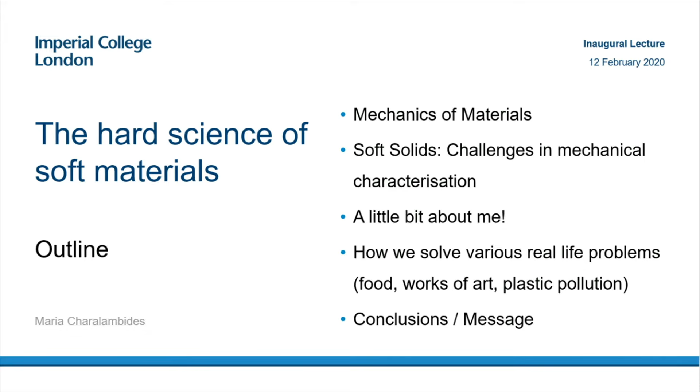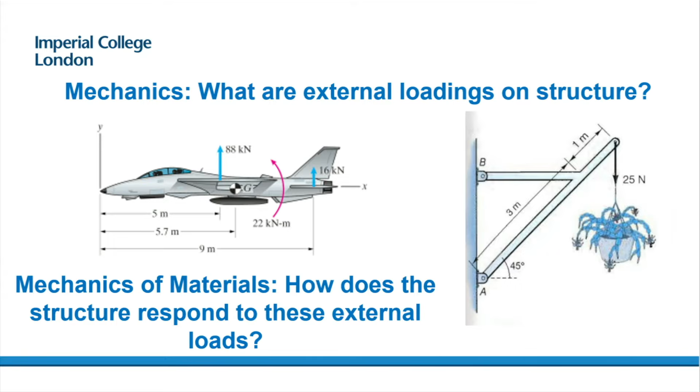Okay, so I've taken these pictures from my first-year mechanics course, and mechanics, the question that it wants to answer is what are external loadings on structures that you want to study. Now, if the interest is how does this structure respond to these external loads, how does it damage, does it deform, does it fall apart, then that's in the realm of mechanics of materials.

To answer this question, you need to look at the materials that make up that structure, and specifically, you need to know what the mechanical properties are of these materials. If you don't know them, then you need to go to the lab and do some tests to find out what these are. So let's say this is a green material that you want to characterize. You want to find out mechanical properties.

First, you manufacture a perfect cylindrical sample like this one, and then you take it in a lab on a mechanical tester, and you apply a uniform load on this cross-sectional area, which is A, and you squash it, basically. So under the application of this load, you can calculate this quantity, which is called the stress. So this is the load divided by the cross-sectional area in which it acts.

And this sample, it will deform to this new shape from its previous height H to the new height h, the shorter and wider sample. The mechanical tester will give you the load as well as the change in the height or the deformation, and from the change in the height you can get the strain. So the strain is the change in the height over the original height. Now, basically this is the response to the applied stress on this material. And for this test to be valid, the stress and strain have to be the same throughout your material.

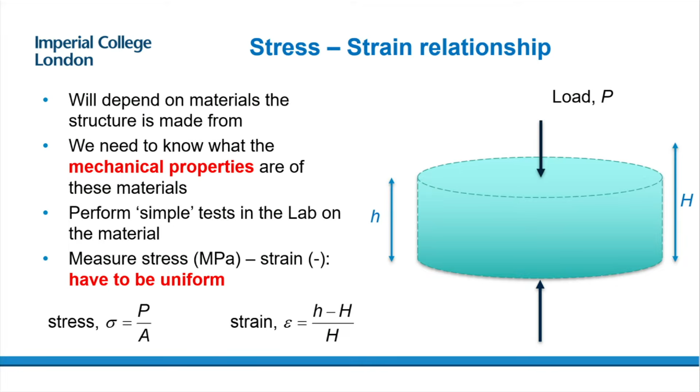Okay, so what are the challenges with this type of work for soft solids? I'll give you some examples of soft solids. It could be foods, it could be paints, gels, soft polymers, all sorts of rubbers, all sorts of soft solids which happen in many, many applications. So it's important to know what the mechanical properties are of these materials.

So what are the challenges with these materials? So there's two areas where you have the challenges. One is in the experiments. For these materials, there's no test standards that will tell you how to make your samples, how to do the test, how to do your calculations to get these stress-strain properties that I was talking about earlier.

It's difficult to make samples of precise geometry, and sadly you cannot machine a chocolate sample into a cylindrical shape. It's difficult to grip or hold them without damaging them, because they're very soft, so if you want to hold them to do a tensile test, for example. Or a lot of them are so soft they're more in the complex fluid domain instead of a soft solid, and then they deform under their own weight. So this is before you start putting external loads on it.

But even if you manage to overcome these difficulties, then you reach the next hurdle, which is the hurdle of how to find a material model that will fit this data that you're going to collect from these experiments. So we need a mathematical description that will provide the deformation as well as the fracture of the material that you managed to get data from for these experiments.

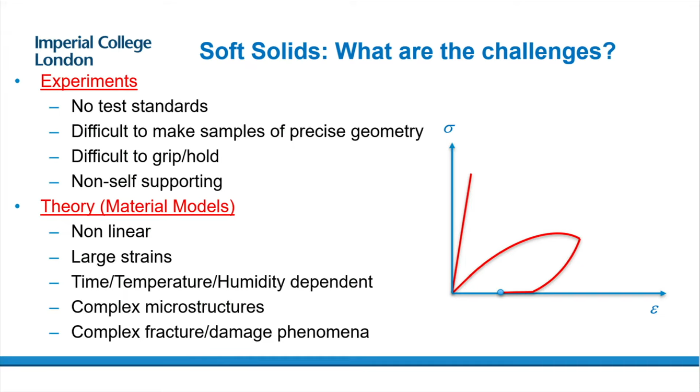The other problem is that this material, when you're testing it, if you slightly change the temperature or the humidity or the speed that you're doing the test, you're not going to get very large differences, whereas this material here will show a huge effect. So this is all the things that makes modeling these materials very hard.

These are some pictures taken from some of our research papers. These are all mechanical tests that we've done. This is dough, tension of dough. This is compression of cheese, and this is gel, again, compression. And all of these are examples of mechanical tests.

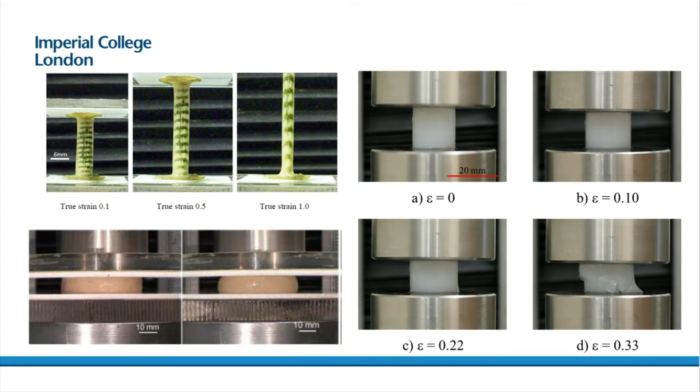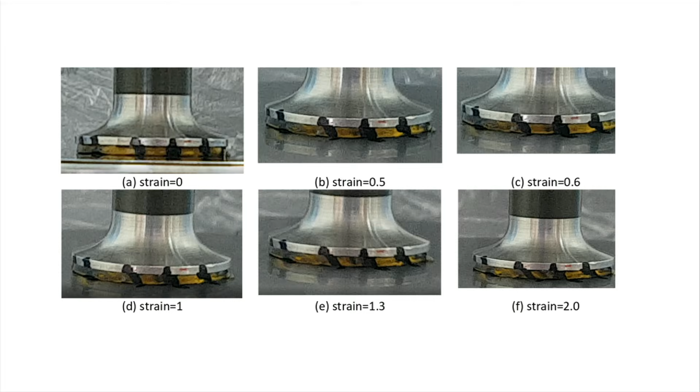And this is slightly different. So we want to characterize this yellow piece of polymeric material here. And how we're doing this, we're putting it on a stationary surface, and then we have this spindle on the top, which will rotate. So you're basically twisting your material, so you're shearing the material. And these are called rheometric tests, as opposed to mechanical tests, the ones I showed you earlier. If your material is very soft, so we said, a lot of these materials are on the boundaries of solids and fluid, this could be your only option of probing the mechanical response of the material.

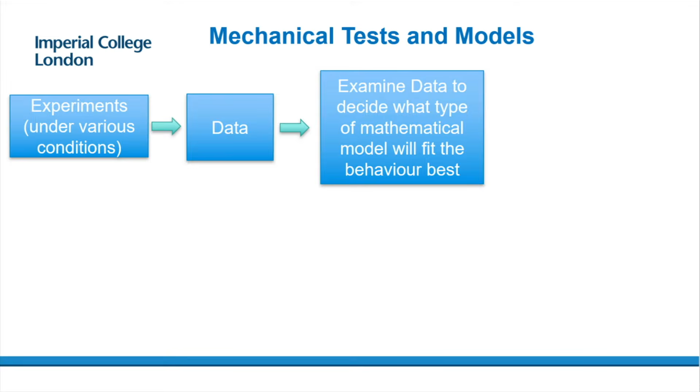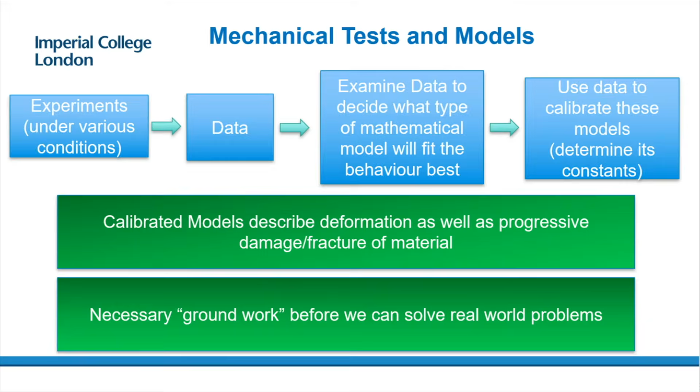Okay, so this is just a summary of this introduction I've made for you. So first of all, you need to go to the lab and do lots of experiments under various different conditions. You amass your data. And then you need to examine the data to decide what mathematical model you'll need to describe this behavior. Once you've done that, then you need to use this data to calibrate the material models. Once you've calibrated your models, then you can use them to describe the deformation as well as progressive damage and fracture of your material. And this is all necessary groundwork that you need to do before you begin using this information to solve real-world problems.

Okay, a little bit about myself before I show you these real-world problems. As Mike said, I got here in 1985 from Cyprus. This is a picture from Akamas. This is the opposite side of the island to where Agia Napa is, which many of you might have heard of. What people don't also know about Cyprus is that it has beautiful mountains. This picture was taken in the summer. We were there on New Year's, and this was covered by a meter of snow.

So this is a picture of my school. This is my secondary school. It's the oldest school in the island. And I was lucky to go to this school because I had very inspirational teachers who knew the subjects extremely well. There's two more people that inspired me to be here. These are my parents, Nikos and Nedi. They're both engineers, civil and mining engineers. And for my generation, it was very rare for my friends' mothers to be educated to university level, let alone an engineer. So my mother was actually the first female civil engineer that was registered on the island.

Okay, so I came here, I did my degree, I enjoyed that. I wanted to stay on and do further research. I did that under the supervision of Gordon. My project was quite interesting. It had both experiments and models. The experiments involved a lot of mechanical testing, which is the ones I've talked to you about.

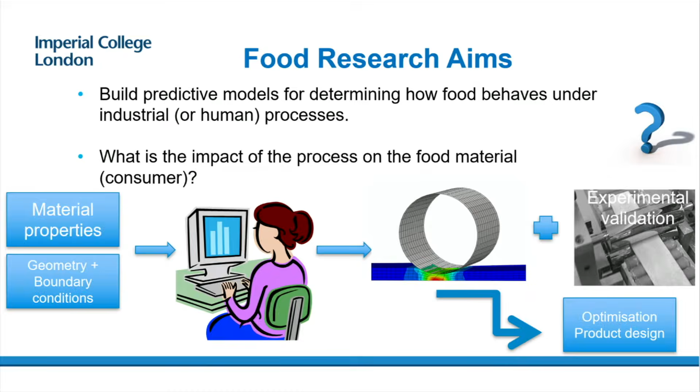If you have this simulation tool, then this tool will output the strain, the stretch that the material sees in this direction as it gets rolled, and therefore you can predict before you do this that this material is going to tear, such that you can avoid it. You can use this tool to decide how to stop this happening, either by changing your recipe, your material, or changing your process parameters.

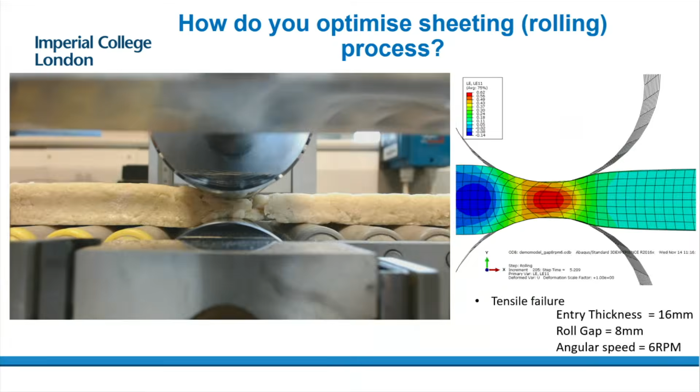Now moving to the oral process. This is what happens when we put food in our mouth. I'll only be talking about texture today. There's aroma and there's taste, which is not part of our research. Texture is basically how does food feel when it is eaten. The food industry wants to know how consumers will react to the new products.

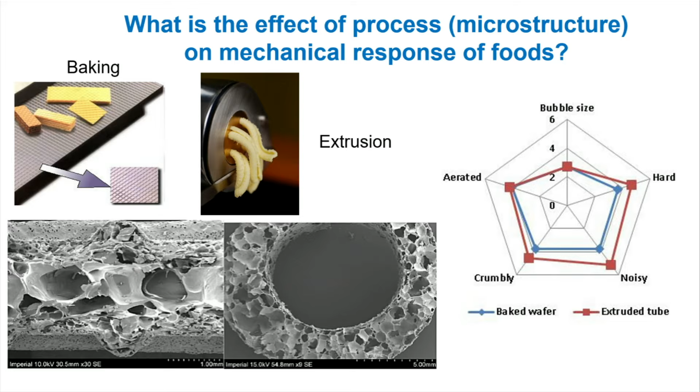These are the structures of the two materials, and you can see the similarities in the two photographs. They're both cellular materials with thin cell walls. I should say that both products have exactly the same density, so that's not what drives the differences. And the pore size distributions are also very similar. So to find out what the differences are, we take the three-dimensional images from X-ray tomography, and we use them inside these computer simulations to do virtual compression tests.

What we do then is we get the output from these models, and then we see what value of mechanical properties we have to put on the solid that makes the thin cell walls, such that the output of these models is the same as the experiment. And this gives us a measure for the properties of this solid cell wall, which otherwise would have been very difficult to measure. And we found that indeed the extruded product has much stiffer cell walls.

The other thing we could do, of course, once we have the two geometries, is to input the same material properties for the solid wall, and then you pick up the differences. Again, this came out to be stiffer, and this is just the effect of the microstructure. So extrusion seems to lead to stiffer microstructures because of the different material in the cell wall, as well as the different architecture of the cellular material.

The next project I'm going to talk to you about is where the pet food industry wants to market these products for cleaning dogs' teeth. It's very difficult to brush dogs' teeth otherwise. When the dog chews these products, through friction, we want to remove the tartar and the plaque that builds up on the dog's teeth. However, dogs come in different breeds. They chew in a different way. Can we have a design tool that we can use cost-efficiently to design these materials?

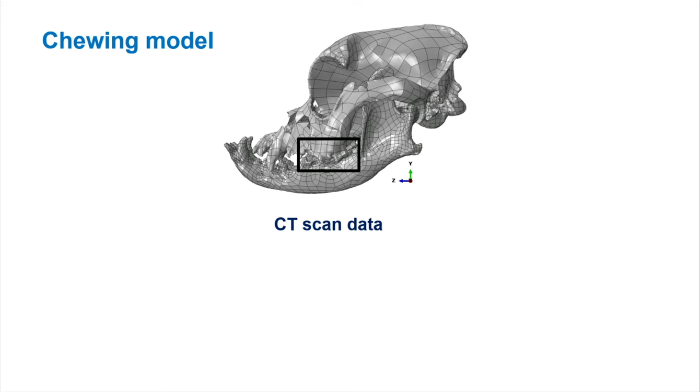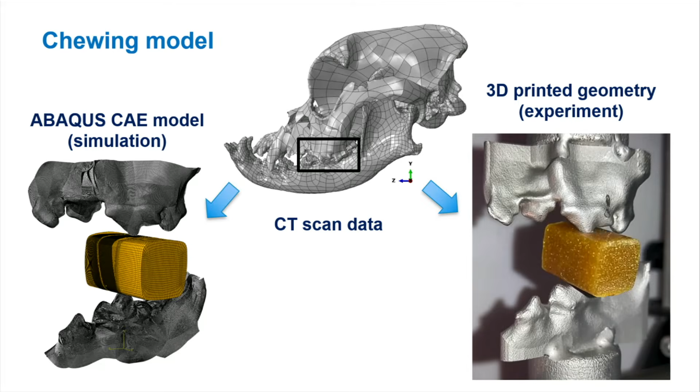And this is what we did to solve this problem. This is a skull of a dog. We concentrated on this region, which are the back teeth here. And we did two things. We used them to fit inside a computational model, and also 3D printed these structures so that we could do a real test. And the idea is to see whether these two match.

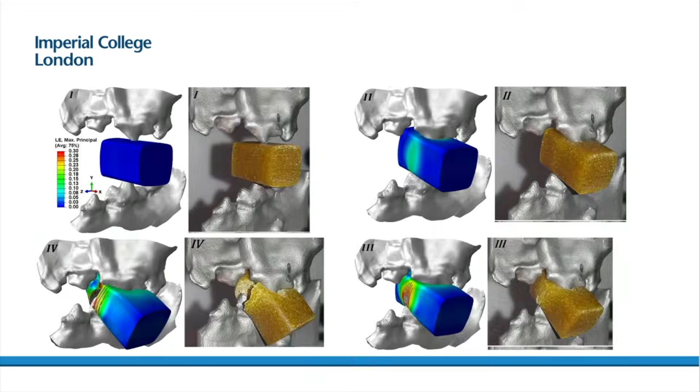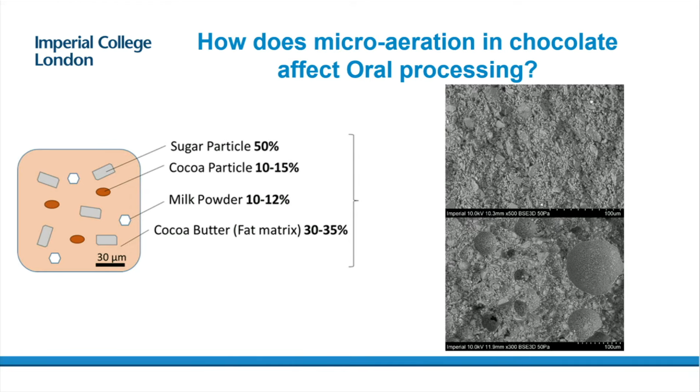What we want to see is the effect of including aeration of about 10, 15%. The scale of these bubbles is about the same as the size of the particles here. And we want to find out what the effect of this is. Now, these are so small that you cannot actually see them. Bubbly food and drink seems to be favored by the consumer. We want to understand why that's the case. And bear in mind that if you don't see these bubbles and you prefer this product to the one without the bubbles, you're actually consuming a lower energy density product as well.

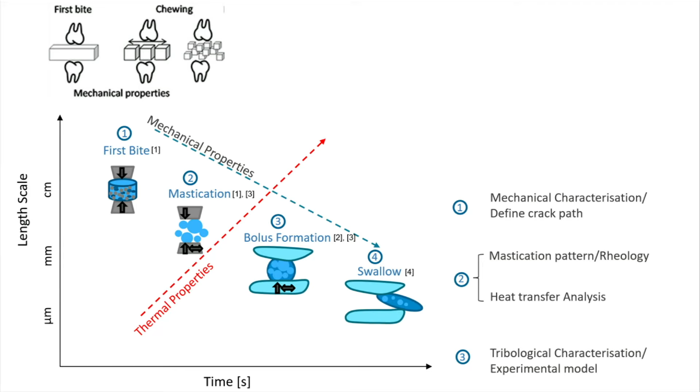So what happens during first bite is you have your material here and it's indented by the teeth, and the purpose of chewing is to break it down into smaller and smaller particles. So on this graph, mechanical properties are very important to begin with. Of course, as this food goes into your mouth at 37 degrees, heat transfer starts taking place. And Yanis here is helping us with this topic. We're trying to answer questions like, does microaeration change this pattern? And does that have an effect on how quickly the material changes phase, for example? Does the consumer pick this up?

Once these particles are formed, then they mix with saliva and they're squashed in surfaces in your mouth to form a bolus, that's what it's called, this soft solid. And then here you would do the rheological test to characterize it.

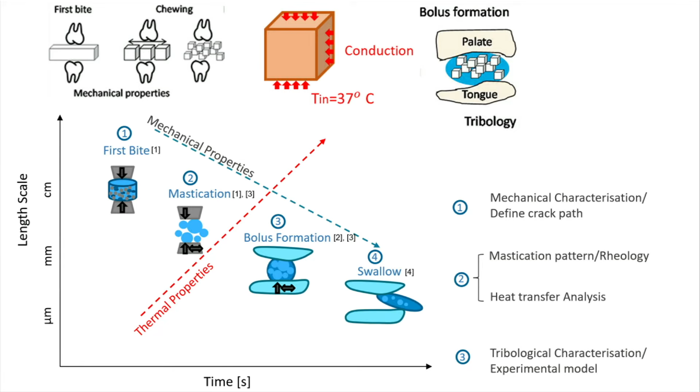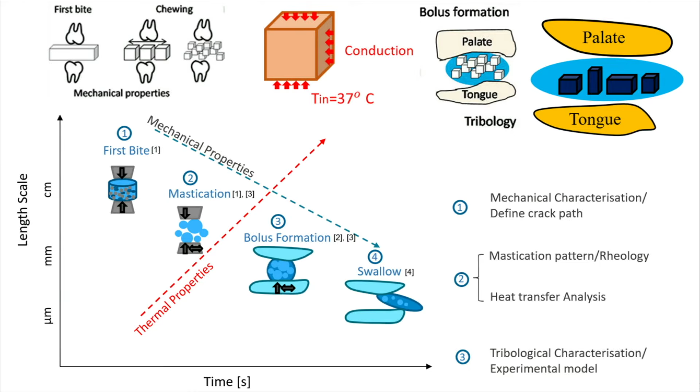Of course, this interaction with the tongue and the top of your mouth is also quite important, and maybe it does affect consumer perception as well. And this is in the realms of tribology, the study of friction. And here, Philippa and Mark are helping us to look at this problem. So it is a collaboration. This is a complex problem, and with different expertise, we're trying to bring it all together to understand what's going on when we have microaeration in chocolate.

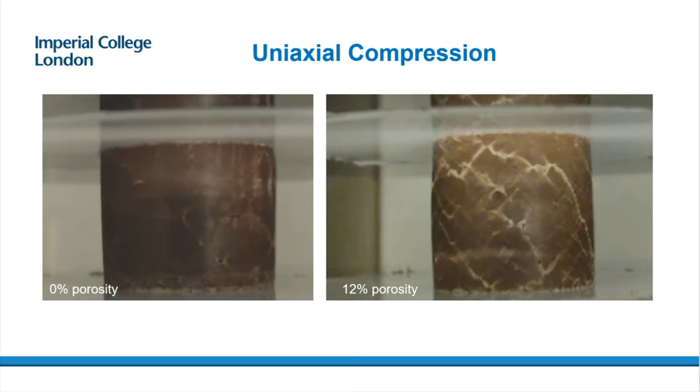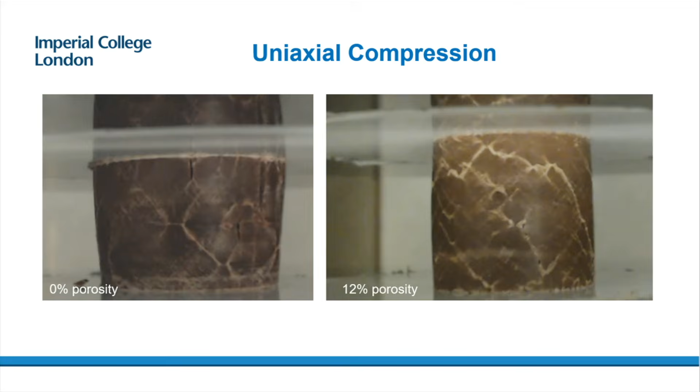This is mechanical tests. On the left here is a 0 porosity chocolate, and here is 12 porosity chocolate. And you can see that this has started forming the cracks straight on. Actually, here the test has stopped because there was a crack that went right through the material, whereas this keeps on going. So it's obvious that the aeration seems to induce earlier fracture in the material.

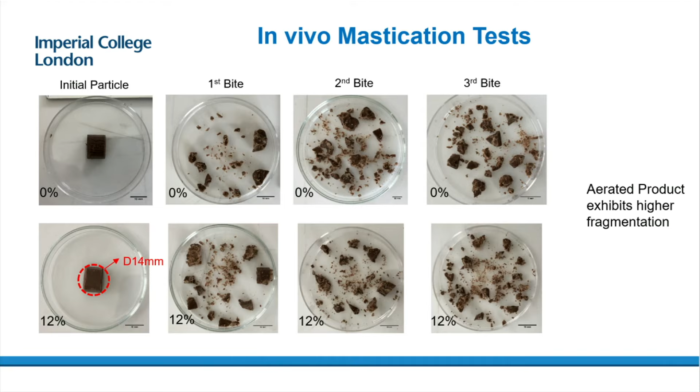What we're trying to do at the moment is to develop models that predict these fracture paths, and that will help with understanding the aim that we had before. But also, it could be quite exciting, because if we have a model that predicts crack paths, then maybe we can strategically place sugar in those regions that will be exposed, and then you will actually sense them in your mouth, because at the moment we're eating a lot of sugar, fat, and salt that we don't actually taste. So this could help to design products which could help us fight diseases like obesity and type 2 diabetes.

Okay, moving on, after you eat the food, it goes down to your esophagus, and then it enters your stomach, where here you're going to get further disintegration, and the food will then leave the stomach to go to the small intestine, and this is the area where all the nutrients are taken up from your food. It's important to study this because it affects metabolism and our health. And here we're looking for tools to design food structures such that they disintegrate in a controlled manner, and we benefit from the nutrients that are available in the product.

One thing I've learned from mixing with lots of our collaborations in this subject, like the food scientists and the medical people, is that just because on a packet it says these are the nutrients that are available, it doesn't mean you access them. It doesn't mean that you will actually benefit from them. Whether you will or not, it will depend on how the food behaves in the gastrointestinal tract.

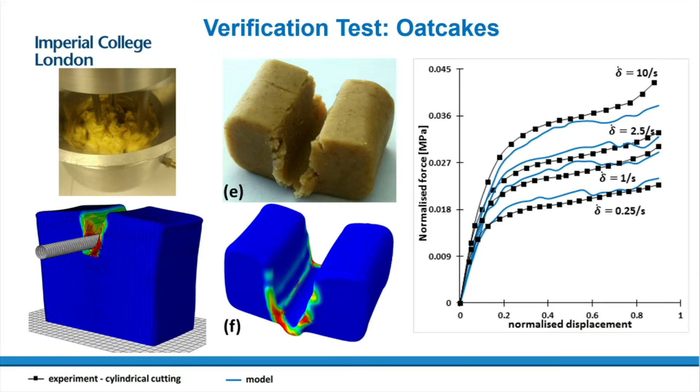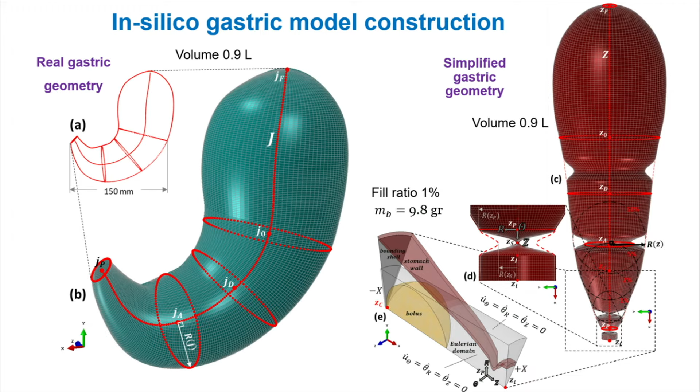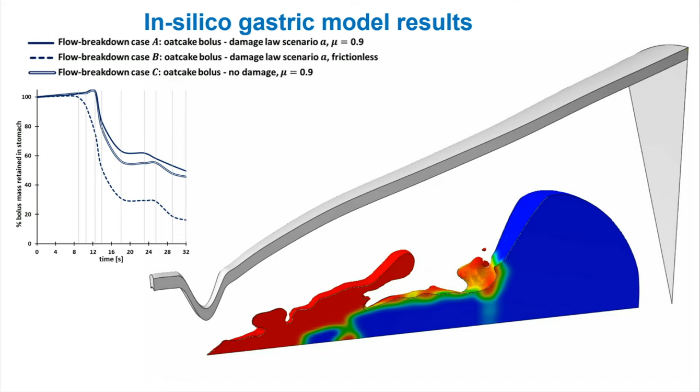So this is the model. And you can see the peristaltic waves and how they break the food and push it out of the stomach. And using models like this, we can study a lot of quantities. One that I have plotted here is how quickly the food leaves the stomach. And of course, this is important for nutritionists, things that might be linked with how quickly you're going to get hungry after you've eaten this meal, of course.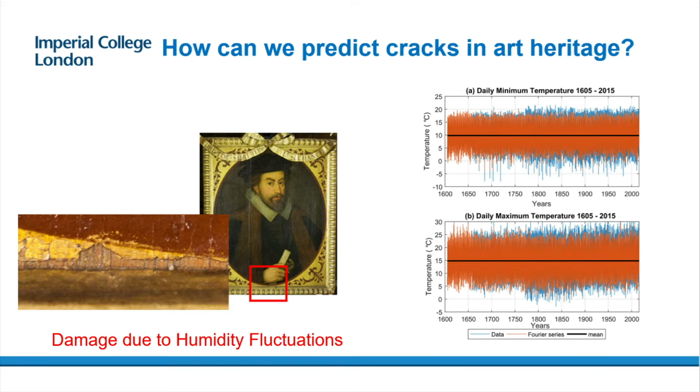Okay, leaving the world of food to something completely different now. The question in this project is how can we predict cracks in art heritage? This is one of 43 portraits that we're examining, and the interesting thing research-wise about these portraits is that there's 43 of them, and they're all stored in the same gallery, in Knole House in Kent, and they're inside some gallery which has no modern heating. So by looking at meteorological data from 1600 to 2015, and using simple models, we actually found out what is the temperature and humidity fluctuations that these portraits have all been exposed to.

Why we care about the temperature and humidity fluctuations: these paintings are made out of different layers of paint. When the humidity changes, each layer wants to expand by a different amount. It starts pulling on the other layers next to it, and that's how cracks form. Of course, this pulling is very small, but if it happens continuously over a very large number of years, then eventually you get fatigue, and this is what causes the cracks.

So there's two types of cracks in such paintings. This is the interfacial or delamination cracks. Basically, this is paint flaking off, like you see here in the gilding of Charles III. So the gilding has come off and has exposed the original blue layer underneath. And the same here with Queen Elizabeth. You've got all this piece of the gilt, the gold bit that came off, and we have the black paint layer underneath. Here we have all the layers have come off, and you expose the wooden panel underneath.

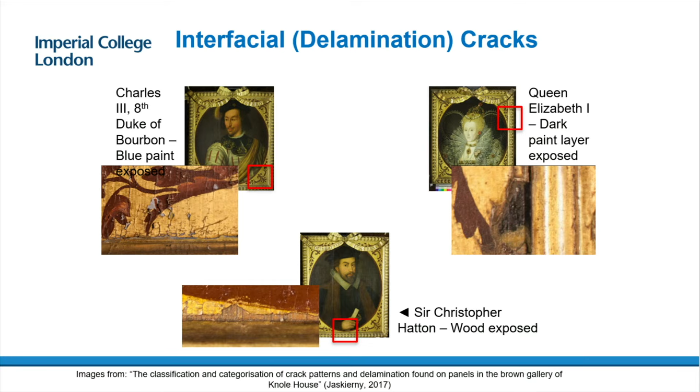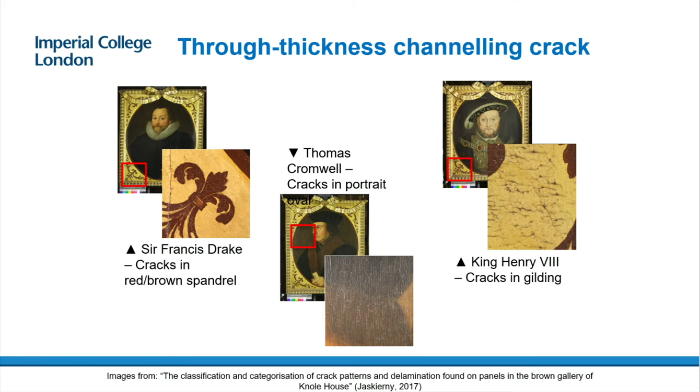The second type of crack is a through thickness crack. So this is a crack that happens normal to the plane here. So you can see it here, King Henry VIII. So you can see these cracks are going through the layers, but also propagate along the painting. And you can see it here on the actual portrait, which is more severe, of course. And there's also some here as well. So these are the models that we built to try and predict when cracks will form as a consequence of this fluctuating humidity and temperature.

This is the model that we use for delamination, the flaking off of the paint. This is a quarter of a painting, and this is the top view. So imagine your painting is this size. We're only modeling a quarter of it. And in the middle here, we have a flaw. We have a crack. We subject this to the fluctuating humidity, and then we see how long it takes for the cracks to start propagating from this initial flaw. And this is the model that we use for through thickness cracks. So this is the cross section, and then the crack is going to go through the thickness, but also it can run along the painting as well.

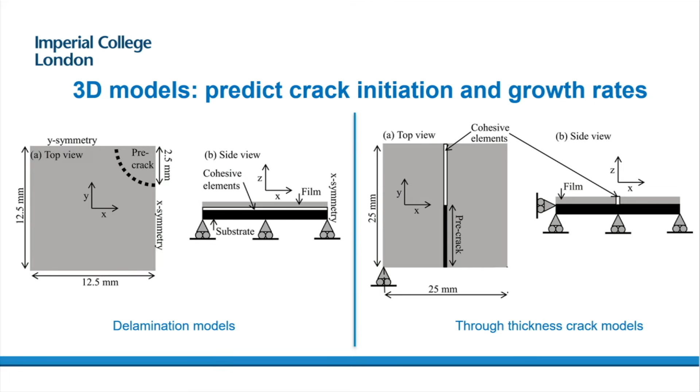And these are some of our predictions. I have three scenarios here for relative humidity. This varies from 35 to 90 maximum, and this is what you would get on a calm day. And it would take just about 2 years for cracks to start growing. These two are much tighter controls that you would typically have. This is the V&A museum control. And you can see that as you make this more and more controlled, then it will take longer for cracks to start growing.

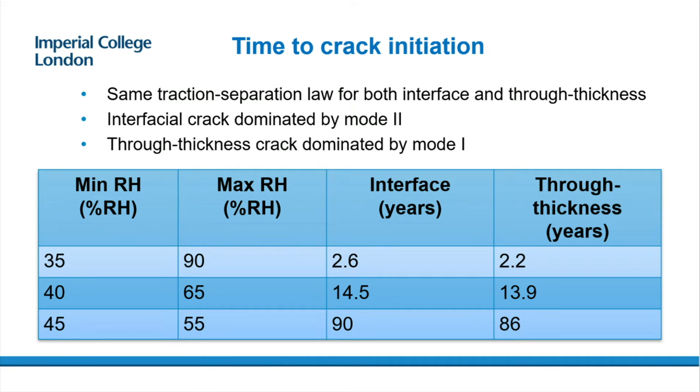And what we're doing at the moment is, it's fine to find out when cracks will initiate. What's more important is how fast will these cracks grow, because it could be that they initiate, but then they don't grow very fast. If they grow very fast, that's a lot more serious, and that's what we're doing at the moment.

Okay, this is a different project that we got involved with within the last year. It's part of a large project within 7 different departments of the college. The aim of the project is: what can we do to reduce plastic pollution?

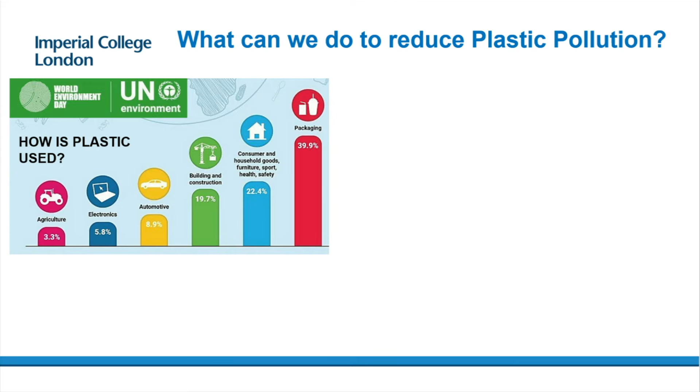So plastics are used in various industries. This chart shows you that the packaging industry is the one that uses plastics most. And this graph shows the top 10 types of litter that were quantified in the Thames River Watch in 2017. And you can see the biggest one is food wrappers. And the others are also plastics which are related to food and drink and fast-moving consumer goods.

Now, there's been a lot of discussion about this plastic pollution in the media, led by very high-profile individuals like David Attenborough and Greta Thunberg here. It could be very dangerous for our environment or our ecosystem. We need to do something fast to reduce this.

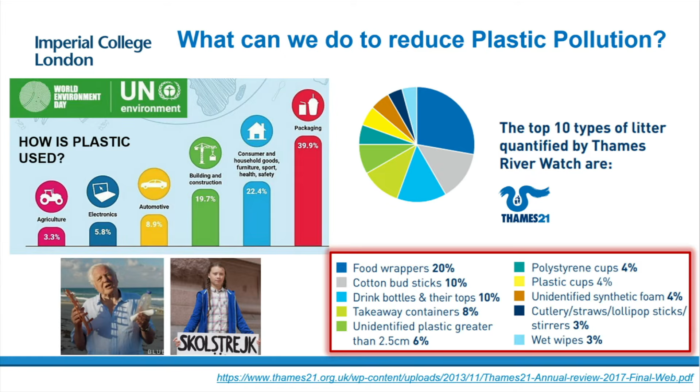Okay, so what have we decided to do? We're going to look at these materials here, the multi-layer packaging materials that we're all very aware of. We've all seen it very often in our kitchens. This packaging has been very cleverly engineered such that it keeps the contents to as long a shelf life as possible, and therefore it minimizes food waste.

They've also been engineered such that you use as little material as possible, so you save your material resources. And it could also mean that if you have a lighter package, then you will have lower transportation costs. This is the typical structure. We've got 5 layers here. So this is the outer layer where all the printing and the brand images will be printed on.

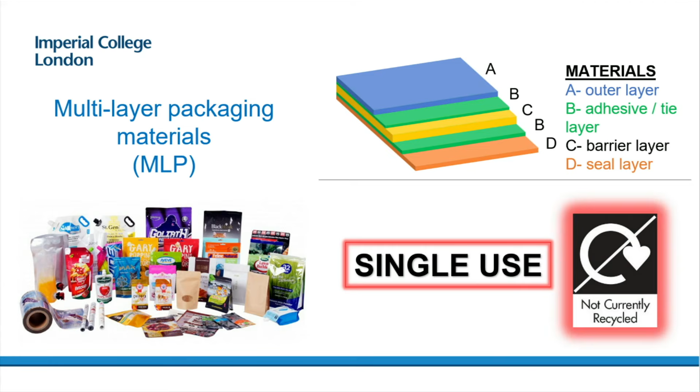The middle layer, C, is the layer that keeps light, moisture, and oxygen out. And this is the layer which is in contact with the food and also seals to form the pack. And the greens are the glue that sticks the other layers together. The trouble with this packaging is that it's single use. Once you've used it, you cannot recycle it.

The reason is, provided that, of course, it doesn't just get littered, in which case it will directly go to pollute our environment, if it does get collected in waste management, it will get sorted into this pile of mixed plastics waste. And then it will either end up in incineration or landfill. None of this is good.

The worst thing is that you had a material, you spent a lot of energy, you made CO2 emissions to produce that material in the first instance, and then you lost it through this process here. Both of these will add to CO2 emissions, and we also have a risk that it could leak back into the environment.

The reasons why these materials don't get recycled are summarized in this table. The first one is sorting, which is not effective enough to pick up the different materials in your package. This is why it ends up in this mixed plastics waste. And anything flexible that's smaller than A4 currently does not get recycled, so food wrappers, for example. Even if you did recycle this and tried to blend them to form a new material, that material is going to have very low value.

The reasons are that its color is going to be a not so exciting dark green, grayish color. The mechanical properties will be very poor, which limits your applications. And that means that recycling is not economically beneficial, and this is why it doesn't get recycled.

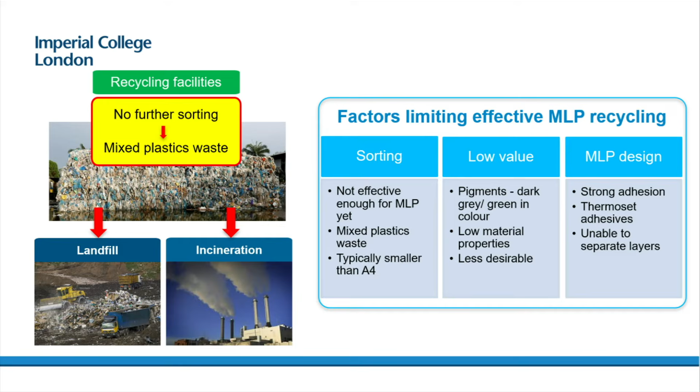The last reason is the way that these packs were designed originally. Recycling was not taken in as a design variable. The layers are very well bonded together, and it's impossible to separate them. If you could separate them, the recycling would have been a lot easier because you would have had a single polymer then.

Okay, there are 2 types of recycling solutions, either mechanical recycling or chemical recycling. And in this large project across the 7 departments, we're looking at both. Mechanical recycling breaks down the materials mechanically, through shredding, for example, and then you melt them all together to form a new material.

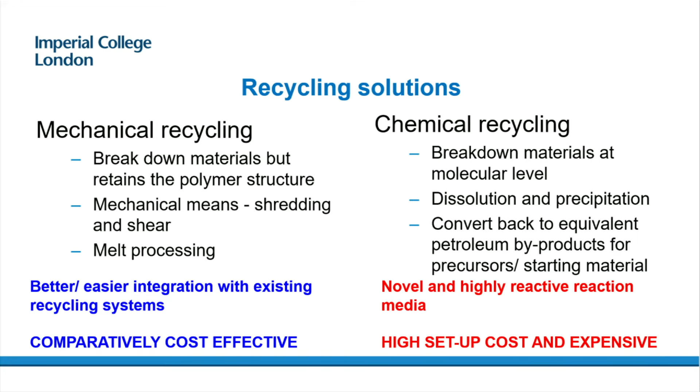Whereas chemical recycling uses highly reactive reactions to break down the materials to their precursors, the monomer that was originally used. And from here it's quite good because then you can start again and make whatever material you want. There are advantages and disadvantages in both. This is very expensive. This is comparatively less expensive and is easier to integrate with recycling systems. But we're looking at both, as I said. Chemical recycling is looked at in chemical engineering. Here in mechanical engineering, we're concentrating on mechanical recycling.

And within that project, there's two things that we thought that we could do to try and solve this problem. Here I have a picture from literature which shows what you get when you try and blend PET film together with a polypropylene film. So the PET separates out into these particles in a continuous polypropylene. The reason why this material is not very strong is because there's not very good adhesion between the two phases.

What you can do is to add a small amount of chemicals, it's called a compatibilizer, which changes the adhesion of those two interfaces, and it makes, therefore, this material have much better mechanical properties. So we're performing studies here, both experimental and modeling, to understand the effect of compatibilization on the recycled material properties.

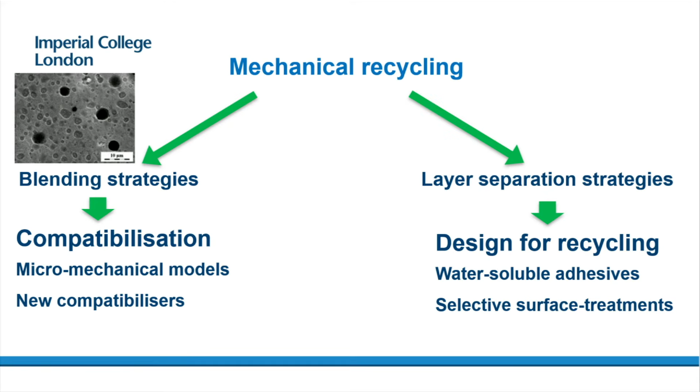The second thing that we're doing is we're trying to look at layer separation strategies. So what if you didn't use those very strong adhesives? You could then separate the different individual films and make the multi-layer package. Or what if you didn't have perfect bonding throughout? You don't really need that. So then when you shred it, you can separate the films very easily and recycle it in a much easier way. I'm going to tell you a little bit more about this.

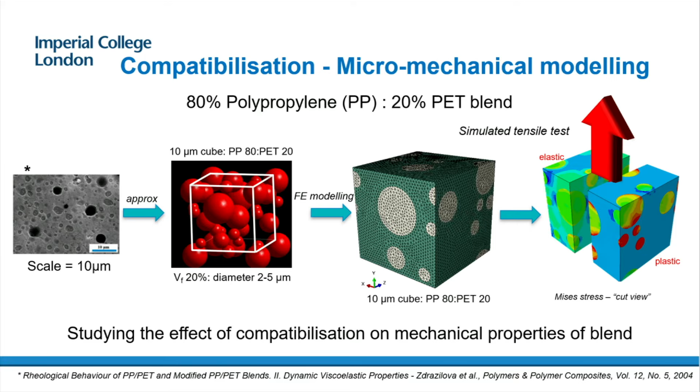So this is a literature picture. Based on this image, you can make a virtual material, with the same size distribution and volume fraction as the original. And then you can do mechanical tests, virtual mechanical tests, to understand what the mechanical properties are of this material as a function of the adhesion between the two polymers. We're in the process of actually doing our own experiments as well, in collaboration with the aero department.

This kind of modeling is called micromechanical modeling, and this is something that we've done a lot of in my group. We looked at a number of materials under the microscope and tried to examine the effect of the microstructure on the mechanical properties. So a lot of materials, when you look at them with the naked eye, they look homogeneous. But when you look at them under the microscope, you can see that they have a microstructure. So this is particles inside a continuous matrix.

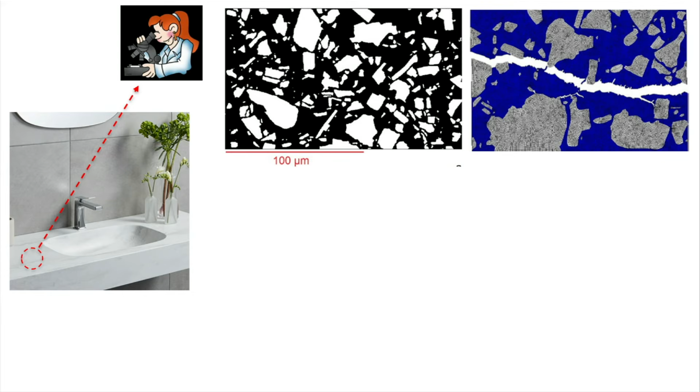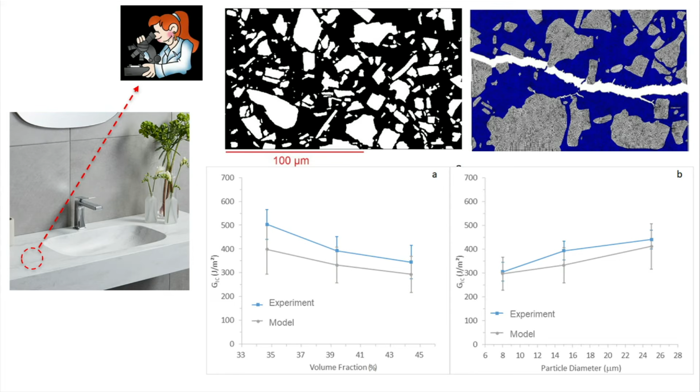And then you can do the virtual tests to predict when this material will crack, how much it will deform. And you can use models like this to predict important mechanical properties like the fracture toughness here as a function of the volume fraction, the amount of the particles you have, and the size of the particles. Once you make these models and you're confident that they're accurate, you can use them as very cost-efficient design tools to make new composite materials.

So this is the end of my talk. So I'd like to end with my conclusions. I think the message I wanted to bring across today is that you can be seen to be doing lots of diverse things, but actually the underlying science is the same. There wasn't enough time to mention everything that we do in the Soft Solids Group. We also looked at bird strike of airplanes with John and Iman. And we also looked at how we could develop adhesive patches to cure onychomycotic diseases on toenails together with Tony, Dries, and UCL.

A lot of these problems, a single team cannot solve by itself. So if you look at the problem of plastic pollution, then you need engineers, you need chemists, you need social science, you need people who understand economics and business models, and you need people that know about environmental policies. If you want to design foods that can lead to healthier products for the consumer, then you will need engineers, food scientists, medical people, nutritionists. However, if you have these big teams, then you can solve problems which will have a very large impact on society.